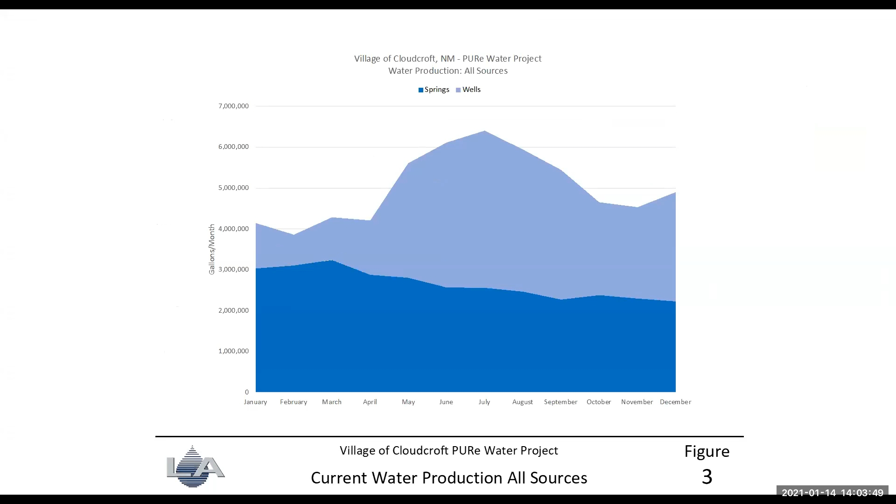If we could back up just one slide, please. There we go. The local aquifer, the way it's configured, has minimal storage. It's not a huge aquifer where they can store water for long periods of time. It really is almost seasonal. By the end of the pumping season, the levels in the wells have reduced substantially, and even go into cavitation sometimes during heavy pumping season.

Historically, drought can and has reduced the water supply by more than 25%. Over the last decade, they have had to call in and have water trucked up to the village on a few occasions. So they're very subject to drought conditions and what that will do to the water supply.

The village has undertaken quite a program looking for additional water supplies historically, whether that's drilling exploratory wells within the same area as their well field, or going outside of the area. They've looked for wells there. They've looked at bringing water in from outside of the area, imported water that way. But nothing has yielded anything of substance when it comes to additional water supply. So there really just isn't any extra in the area for the village.

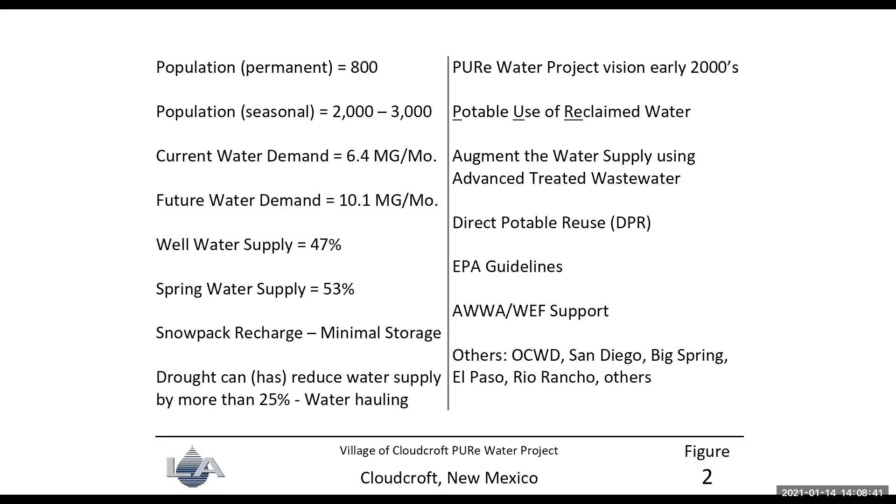So this graphic shows the current water production from both the well and the spring standpoint, and it represents the maximum available production for the village of Cloudcroft. They are now in a stage 1 water conservation mandate, so they are producing all that they can through their water production facilities. About half of that is spring water, half is well water. The wells are used extensively during the peaking months, and they can pump down quite a bit by the end of the pumping season. Next slide, please.

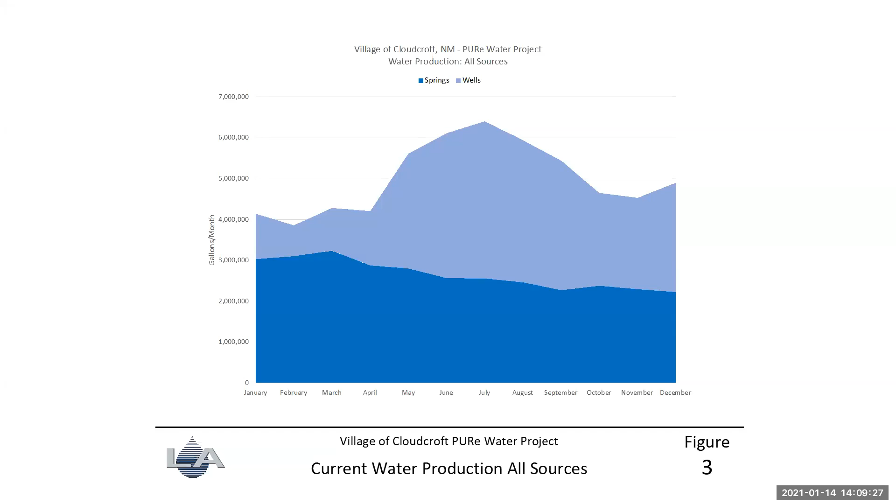So this graphic shows what the pure water would do to the village's water supply. It assumes a fairly mild drought of only a 15% reduction in supplies, with their largest well out of service. In order to just meet demands, about 30% of the water supply would come from the Pure Water project. So this really emphasizes the importance of adding this to their portfolio of water resources.

Without the Pure project, that second tier graph would be all that they could supply in this scenario, and they would be in some very restrictive water conservation. So they just wouldn't be able to provide the water that the village needs in a situation like this. And this is a very highly likely scenario given the past. Next slide, please.

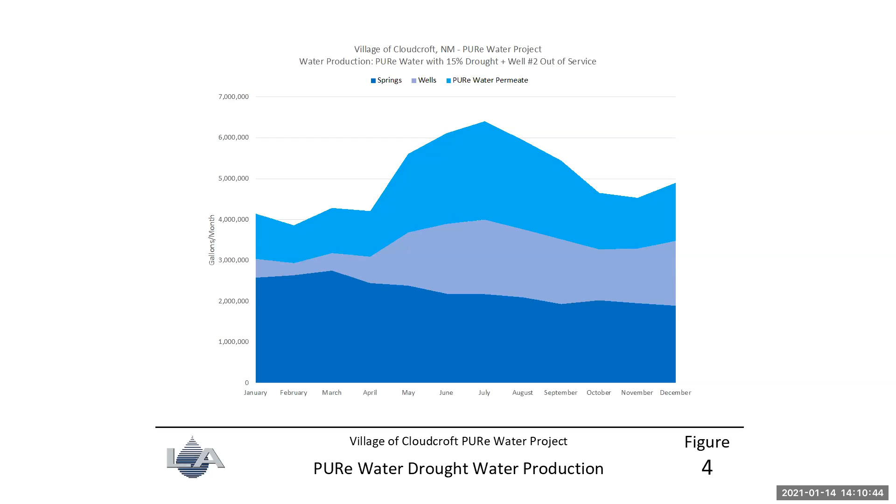Next slide, please. So let's take a look at the process flow in the Pure Water project and see how the whole thing fits together. Starting at the upper left-hand corner, water would come from the wells and springs into a blending reservoir. From there, the water would be pumped through drinking water treatment, and we'll get into details on that, but it would receive standard drinking water treatment and then go to the community for use.

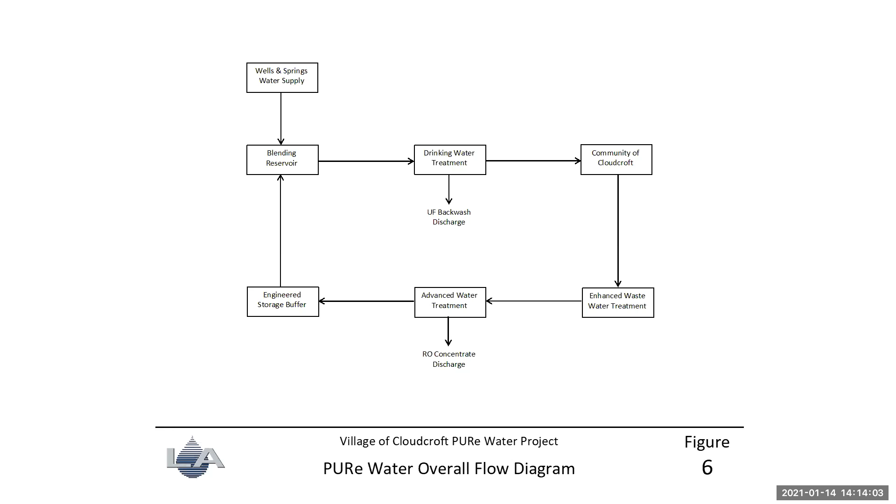Next slide, please. So this looks at the same diagram, but now we'll get into a little more detail on the treatment technologies used. So again, we start with the wells and the springs, and those flows are discharged into an 800,000 gallon covered and lined reservoir. Then that gets pumped to the drinking water treatment process, which consists of an ultrafiltration membrane treatment process, ultraviolet light disinfection, and granular activated carbon adsorption, chlorination, and then on to the community of Cloudcroft.

From there, the return wastewater flow is treated with a membrane bioreactor, which produces very, very high quality effluent and really conditions it for the next downstream process, which is the advanced water treatment process. And so from there, it goes into a reverse osmosis membrane process for demineralization and others. Then it goes through an ultraviolet light and advanced oxidation process, and we'll get into some more detail on that, but for disinfection and other great things.

And then chlorination. The treated RO permeate is stored in a 1 million gallon covered and lined reservoir. And then that is transferred to the 800,000 gallon blending reservoir to go back through the process again. So this just gives an overview of what the treatment process is. And so this is designed for about a 50-50 blending ratio with the well and spring water and the RO permeate. That can be adjusted by the operator, but we wanted to maximize it out at a 50-50 ratio of blending.

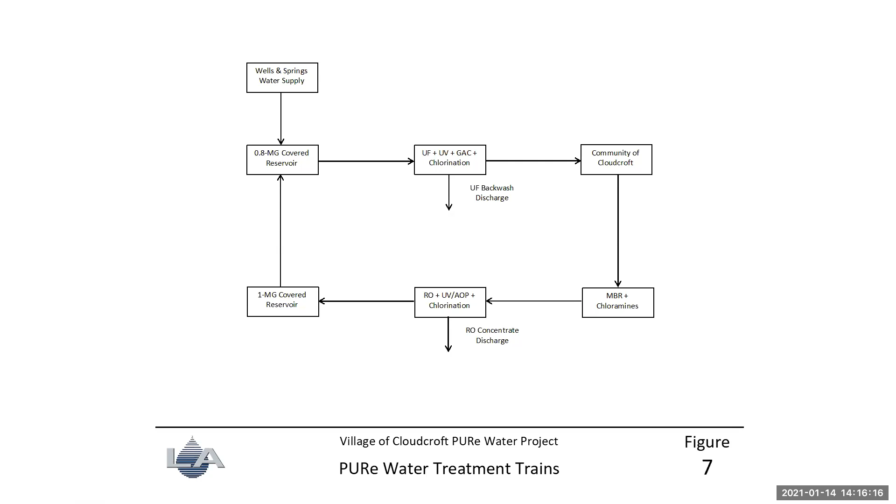So next slide, please. So this is a map of the overall system, the map of Cloudcroft there to the left, and you can see we start at the wastewater treatment plant in the upper left-hand corner. So the MBR effluent is disinfected with monochloramine and then is pumped up to a water storage tank on top of a hill there in Cloudcroft on the high points. Then from there, it flows by gravity all the way down Highway 82 to the ski area where the water production facilities are located. You can see that on the lower right-hand corner. It receives treatment and then gets pumped up the hill to the hilltop tanks, which are the first distribution water storage tanks. And then from there is distributed into the community.

I do want to point out you can see that green line that goes from the water treatment plant back up the hill a ways to the Apache well. And that is one potential place to dispose of the reverse osmosis concentrate in a disposal well. There's some other alternatives that are being looked at, but that's just worth noting on this map here. But you can see that the water production facilities are right there by the Cloudcroft ski area. And so that's the overall layout of the system.

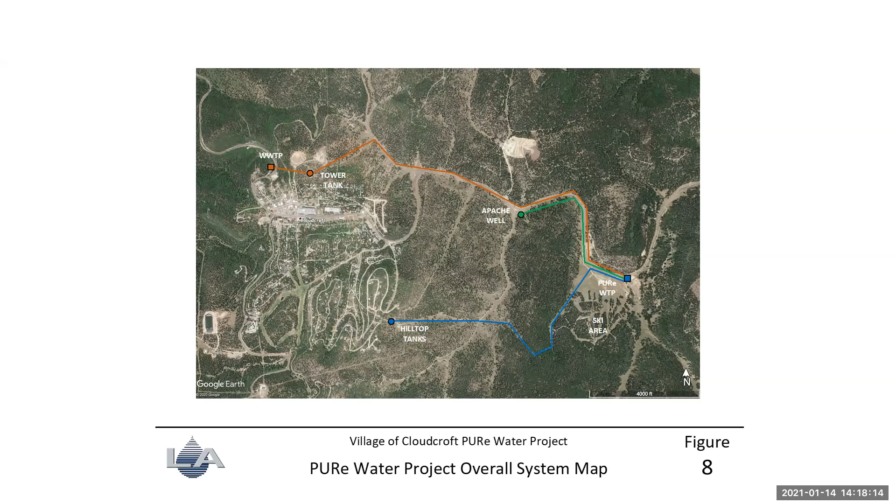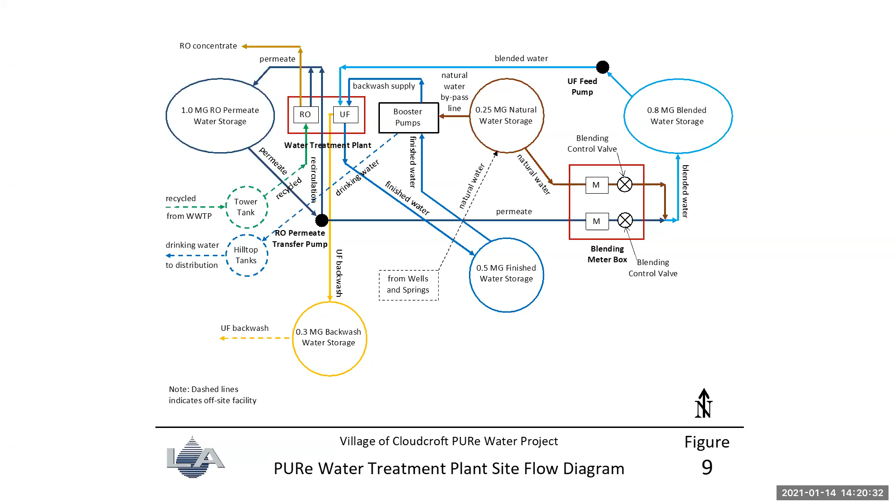So this is kind of a site map of what's currently existing there, and just to point out a few things that kind of match the graph there, you can see the 1 million gallon covered reservoir there. You can see the water treatment plant building, the 250,000 gallon natural water storage tank, the 300,000 gallon backwash storage tank with the open top, the 500,000 gallon finished water storage tank, and the 800,000 gallon blending reservoir.

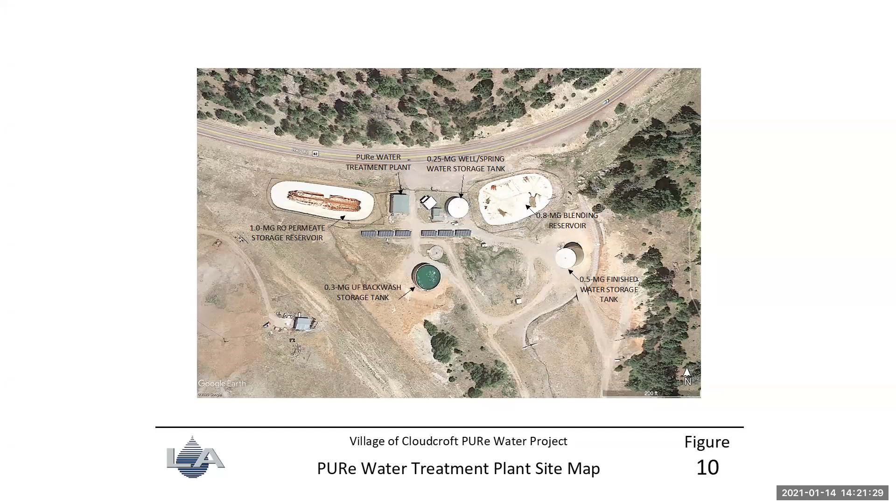And then one thing also to note, you can see the solar panels that are sitting out there. Those produce electricity that help offset the cost of the operations in the water treatment plant. And then the ski area is just off to the immediate left there in the diagram. Okay, next slide, please.

And so not only does that provide the benefit of reducing the mineral content, but there's also some very good reduction in pathogens and things that we want to get rid of through the reverse osmosis system. So it is a barrier that we like to use, and it provides some real benefits there. And it's nice because it's driven by gravity pressure. So from an operational standpoint, there's not high pressure pumps and things like that. So that's a real savings.

Then we go through the ultraviolet light and advanced oxidation. And so we inject hydrogen peroxide upstream of this very powerful, very high dose ultraviolet light. And that has a tremendous effect on trace organics, and it provides a tremendous disinfection credit as well. So that's a very important part of the treatment process. And then we disinfect that water and it goes to the storage tank.

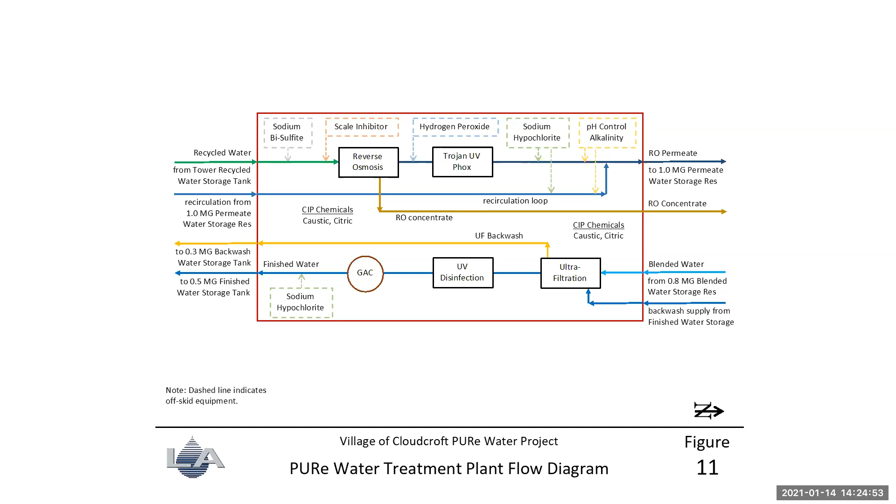And so this provides a real benefit to the customer in that a number of residents are using water softeners in their house to reduce that hardness. Well, this will help from that standpoint, and they might be able to either get rid of their water softeners altogether, or certainly cut down on salt usage and things like that. So there's real benefits from just that water quality standpoint.

But the next thing is the pathogen reduction using what's called log reduction credits. And so what this does, the main goal of the pure water treatment process is to make the water chemically safe and safe against pathogens. And so the pathogens that are really looked at in detail are virus, cryptosporidium, and giardia.

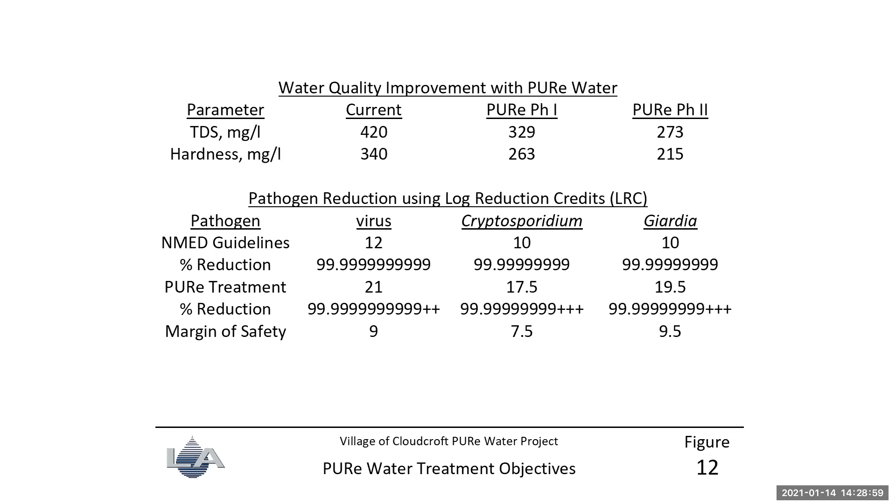So the guidelines from the Environment Department have been, they contracted with the National Water Research Institute to develop potable reuse guidelines for the state. Their independent advisory panel came to Cloudcroft during 2014 to review the project and make specific recommendations in a separate report to the Environment Department. And that is what we started using going forward with the process.

But at the same time, they published a final report for the state, recommended DPR general guidelines and operational requirements for New Mexico. And so this was presented to the Environment Department to give them help in developing their own potable reuse guidelines. And so that was a task for them to do, and they have not completed that task yet. So there aren't published guidelines from the Environment Department on this, and so we have defaulted to what the expert panel has recommended, and it appears that the review comments that we get also reflect these guidelines, and so I think everybody's on the same page from that standpoint.

Next slide, please. So one of a series of the things that the Environment Department would like us to do prior to bringing the system online is operate a full scale, that's operating at design capacity, pilot study, or better, demonstration study for up to a year.

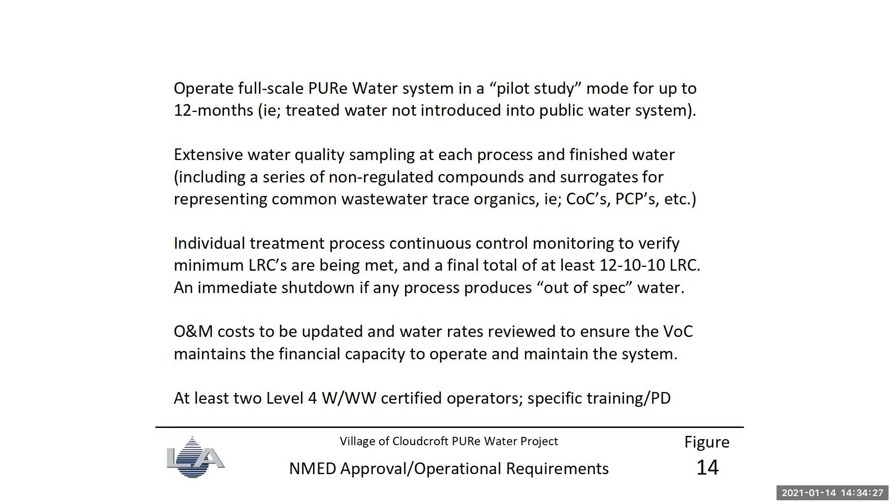Questions? Mr. Chairman, Councillor Sorg, go ahead. Thank you. I was wondering how this project and Cloudcroft handles the state engineer's office, and specifically the discharge of water. Is Cloudcroft required to discharge a certain amount of water?

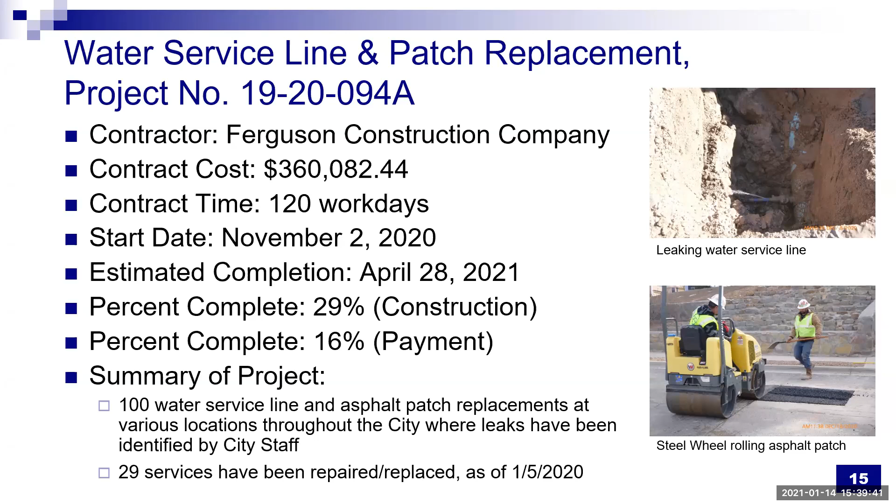Before I move to the next project, do you have any questions on this project? Hearing none, go ahead. Next slide, please.

The next project is the Triviz Water and Gas Line Improvement, project number 19-20-138. This slide shows the map of the project on Triviz Road. This project included installation of a gas pipe and a water line.

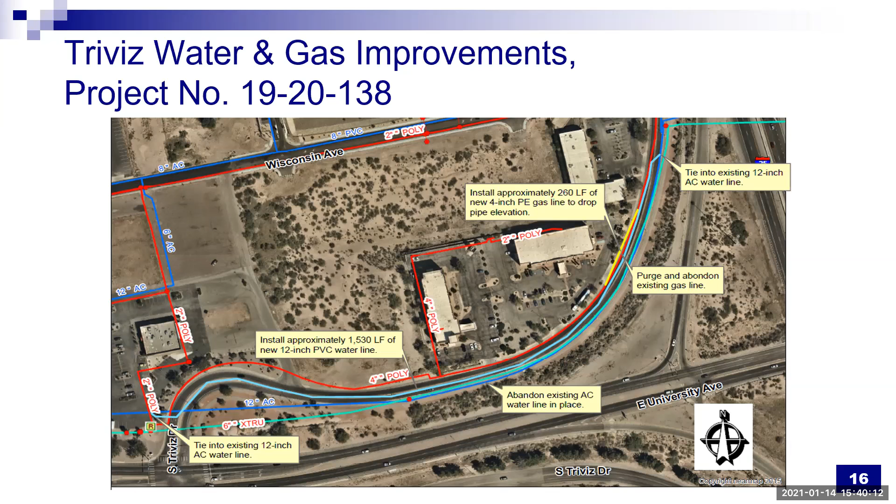Next slide please. The contractor on this project is J29 Enterprise LLC, with a contract cost of $103,599.90 and a contract time of 30 working days. This project started October 19, 2020, and the original estimated completion date was December 7, 2020.

However, because this project goes along with the NMDOT project, we had to give our contractor, J29, a suspension letter to allow the state to come pave the street, so we could go back and do the concrete collars around the water valves. As of the January 5th presentation this slide shows 97%, but as of last week this project has been completed, as the state paved the road and our contractor came back and did the concrete collars.

The reason we brought this project back is we had some questions from Commissioner Hardy about continuation of work when NMDOT suspended their contract due to positive COVID cases within their crews. We have two different crews - the city contractor does not interact with the state contractors. So our contractor, J29, kept going and completed our project on time, and we did not have any positive COVID-19 cases within J29 or the city inspectors and staff on that project.

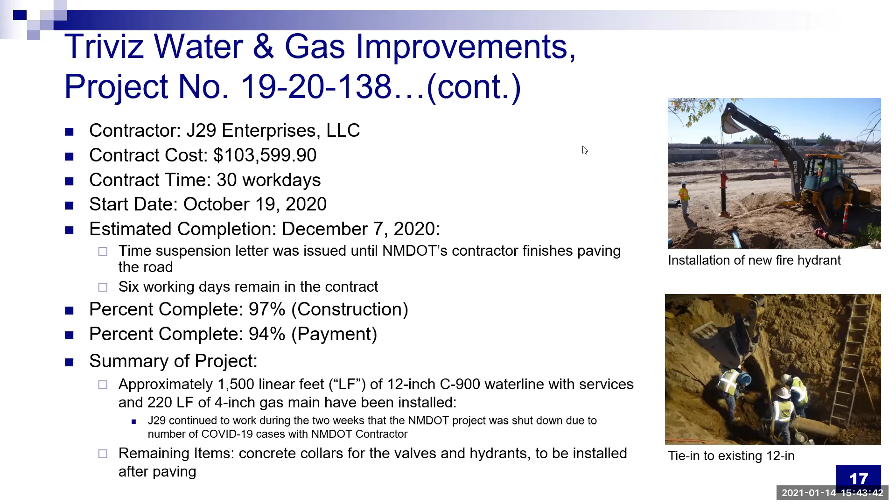Next slide, please. Can you forward to the next slide, please? Next project is Talavera Low Pressure Gas Distribution Network, Phase 3A, project number 19-20-124. This slide shows the map for the project, which is south of Dripping Springs, east and north of Soledad Canyon Road. Next slide, please.

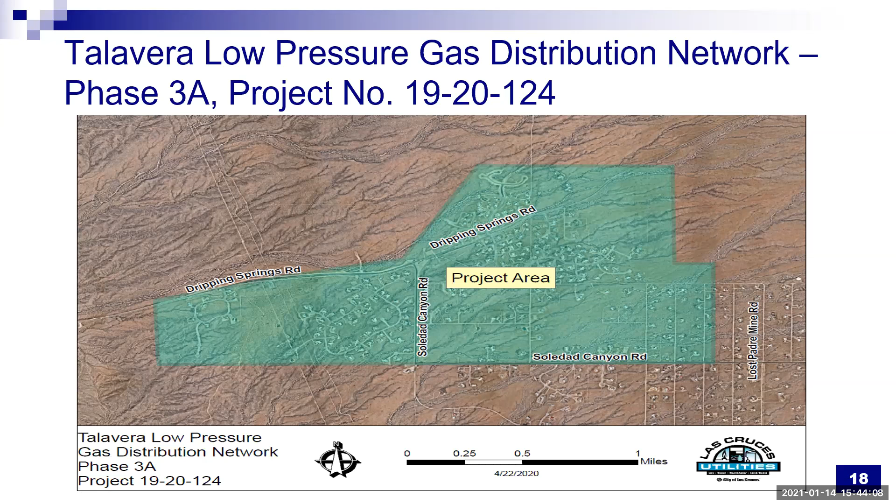The contractor on this project is SmithCo Construction. The contract cost is $3,060,433.60. The contract time is 214 working days. The contract started on August 10, 2020, and the estimated completion is June 17, 2021.

There is 38% completed on the construction and 36% on the payment.

About 98% of the 4-inch polyethylene pipeline has been installed, consisting of 13,787 linear feet. There are 7,574 linear feet of the 2-inch polyethylene line that has been installed, which consists of 12%. And there are 31 of the 3/4 inch stub outs installed, consisting of 17% of the overall stub outs needed in this project.

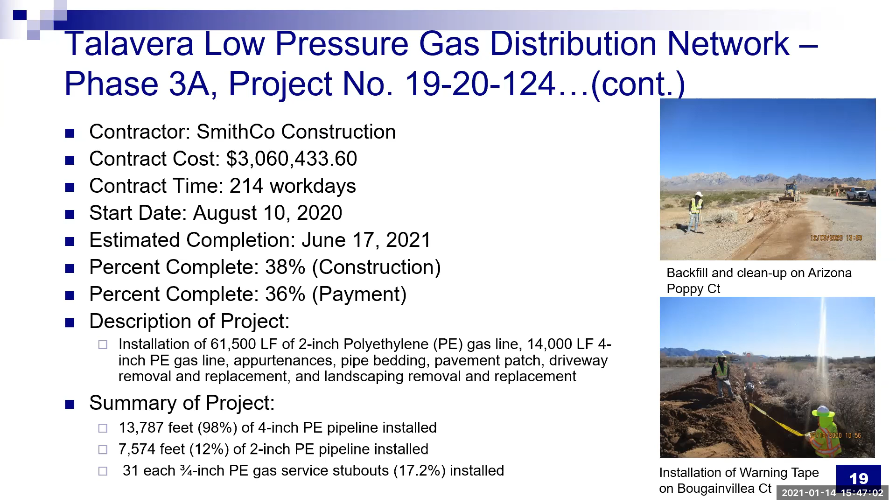Okay, the next item of business is resolutions. The first resolution is resolution number 20-21 LCU 020, a resolution authorizing Las Cruces Utility staff to incorporate the water rights conveyance schedule into the Las Cruces Utilities Water Service Tariff.

Motion to approve. Commissioner Johnson, so move. Okay, Commissioner Johnson moves. Second? Commissioner Hardy seconds. Thank you. Discussion.

Chairman, Commissioners, Jose Provencio, Deputy Director, Business Services. Resolution number 20-21-LCU 020 seeks approval to incorporate the initial water rights conveyance schedules approved by Council in the year 2000 into our water service tariff. With this action, we've incorporated all pertinent service conditions, terms and price schedules, meter connection charges.

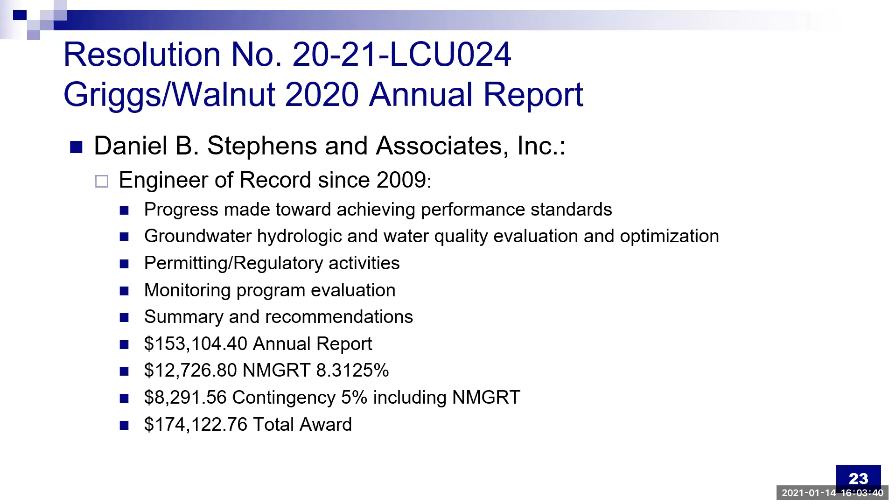You're welcome. Any other comments or questions? Hearing none, ready for a vote. Vice Chair Archuleta. Aye. Commissioner Bencomo. Yes. Commissioner Carmichael. Yes. Commissioner Hardy. Yes. Commissioner Johnson. Aye. Commissioner Sword. Yes. And the chair, yes. Thank you. That concludes the resolutions for the day. The next item of business is old business.

Thank you, Mr. Chair. Delilah Walsh, Director. We do have a few items in old business as well as new business. And the first being the naming of our sewer truck. And I will turn that over to John Mrazek. There I go. I found the button. This is John Mrazek, Wastewater Deputy Director. And as you may remember, there was a contest with the Las Cruces Elementary Schools to name our sewer inspection camera. Because of COVID, the naming contest selection was postponed. We have included in your packets the 5 submissions for you to consider and to vote today.

Alma, if you'll run that vote. Sure. Chair, did you want to call on the committee, or did you want me to? Go ahead. Okay. We will start with Vice Chair Archuleta. You have one of 5 choices here on the screen. You're muted. Sorry, Alma Ruiz, Senior Office Manager for the Utilities Department. There you go. Waldo. Waldo. Thank you. We are now going to go to Commissioner Bencomo. Rubble. Rubble. Thank you. Commissioner Carmichael. Rubble. Rubble? Yes. Okay.

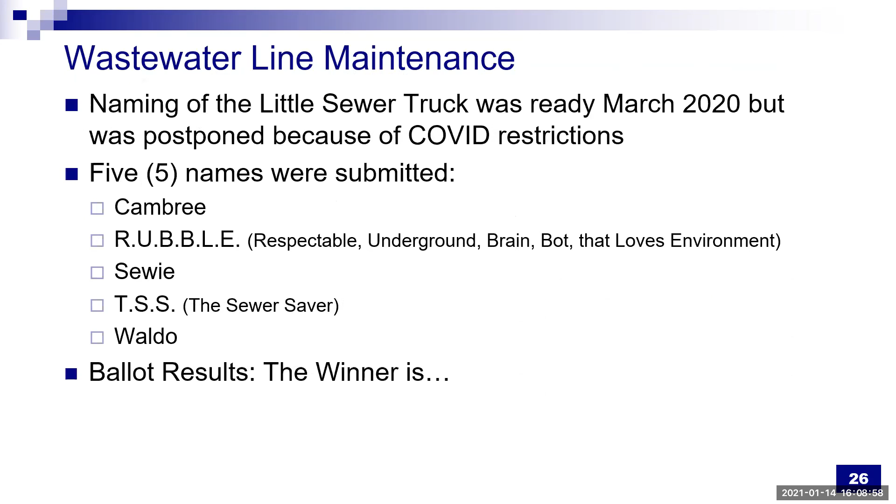Good afternoon, Chairman, Commissioners. Robin Lawrence, Deputy Director for Solid Waste. So we launched our new solid waste routes on Monday, January 4th. And prior to the launch of the new routes, we fully utilized almost every form of communication to get the word out to our residential customers that their days may be changing. So we ran newspaper articles, had PIO radio announcements, had bill stuffers, social media posts, and individually addressed letters to

residential customers. As with any change, not only our customers, but staff is having to get used to the new routes. And our residential and commercial drivers have been learning their new routes last week and this week. And they're working on fine tuning the sequence in which they want to pick up their containers and getting it set up in Routeware. So it's definitely a process, but we are moving forward and hope to have everything smoothed out within the next couple of weeks. I'll stand for any questions.

No questions. Go ahead, please. Thank you, Mr. Chair. Again, Delilah Walsh. And next we have Alma Ruiz, who will recap on our strategic business plan survey results.